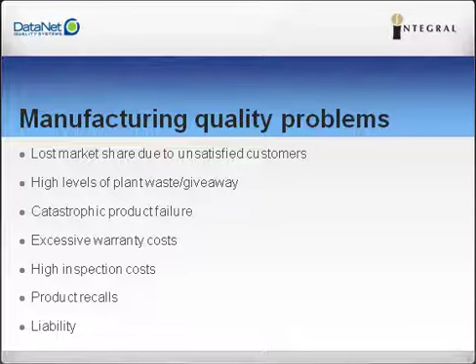We also experience, unfortunately, catastrophic product failures. So when products fail in the field, that leads to huge problems. Obviously, we have customer complaints, we have lost business, we have warranty, we have recalls, and a serious aftermath is litigation. So often we testify as expert witnesses into causes of failure, and many of these lawsuits well exceed $100 million in penalties. So we're talking about a lot of money on the line.

I want to move there to talking about losses in profit. Right now, everybody's hearing in the news about the Toyota recall. It's making big news. But I think what hasn't made the news and what should also be making the news is over the past 40 years, there have actually been 77,000 automotive safety recalls. And that's just in the United States. That excludes the rest of the world.

Another important statistic to understand when we talk about losing money is that the U.S. auto industry spent $14.5 billion on warranty in 2008 alone. So net profit is usually only a small percentage of revenue. So when we think about how much is warranty really eating up of our profits, very often it's eating up at least half of our profits.

Just talking about recall costs of consumer products, where we're not going to talk about automobiles, consumer product recalls exceed $700 billion a year. So when we talk about making an investment in quality, these investments in quality are very, very small relative to the potential gains that we can have.

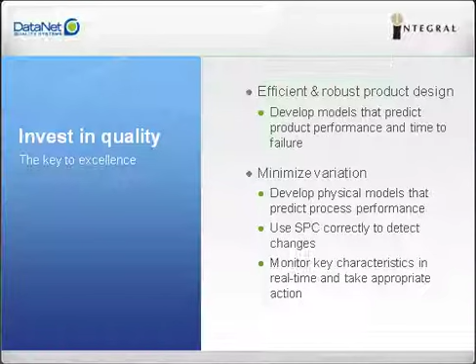Now, when we talk about investing in quality, there are two basic areas that I want to talk about. The first is product design. And in product design, we should be very quickly developing new products so that we can get to market first, but we also want to be developing these products to be highly robust, and by that I mean they work in a wide variety of environments, but also we want these products to be highly reliable.

And what we see from our excellent manufacturing clients is that they develop predictive models that actually predict product performance and actually predict time to failure of their products, so that they know in advance how their products are going to perform in the marketplace. I'm just going to give you a simplistic example of how you can do something like that.

So imagine that you're designing an automotive window and door system. All right? There are a lot of things that you're going to need to take care of. For example, you're going to want to make sure that the wind noise is not too great. You're going to want to make sure that the door closing effort is reasonable. You're going to want to make sure cosmetically that the margins, the seals, the flushness, the gaps, and all that looks really nice. Also that you can cycle the door to failure and know what kind of performance you're going to get or how long the door system is going to last.

What these great companies do is they actually have physical models that predict what the wind noise will be, what the door closing effort will be, what the gaps are going to be, and so on and so forth, for all the design variables, like the material choices we make and also the dimensional choices we make, so that as we're changing dimensions, we can actually see the effects on wind noise, door closing effort, and so on and so forth. So that's where we see the excellent manufacturers stand out, at developing these physical models that predict performance.

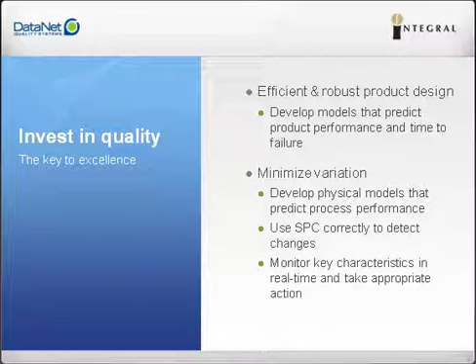What happens is when this goes to litigation and we go back to the plant and start discovering data and information, we extract data that nobody ever bothered to look at real time. But when we do extract that data, very often what we find is there was a statistical change in the process, right, that coincides just with the time when all the customer complaints begin. Had these companies been using SPC real time, they would have been able to detect right away the statistical change and prevent the huge issue that ensued afterwards.

So I want to go into talking about 5 practical steps that you can take to make sure that you have this high quality and manufacturing excellence. And the first step is to prevent rather than to react. So when we prevent, then we can really eliminate our scrap, rework, warranties, repair, customer complaints, things like that. We also can improve our quality, our reputation, our competitiveness, and our profitability, which is really, really important.

So I want to go in and I want to talk about prevention tools. There are some traditional prevention tools, and they tend to be more on the qualitative side. So things like failure modes and effects analysis, FMEA, mistake proofing, cause and effect, brainstorming, things like that. However, I want to see people, and basically the world-class manufacturers, use much more progressive prevention tools.

Those progressive prevention tools include data-driven things like real-time statistical process control, design of experiments, reliability, statistical modeling for prediction, hypothesis testing, multi-response optimization, and so on and so forth. So there are so many quantitative tools available that help us.

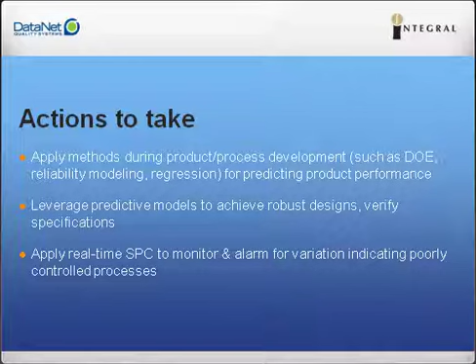So some practical actions that we could take is applying these methods during product development so that we can be predicting performance. And a typical tool that we can be using is design of experiments or reliability analysis and testing and regression models in the product development stage. Also, we should be applying these methods during process development so that we can also be predicting process performance. In addition, when we have problems, we can very quickly deploy these tools as well to very quickly resolve issues.

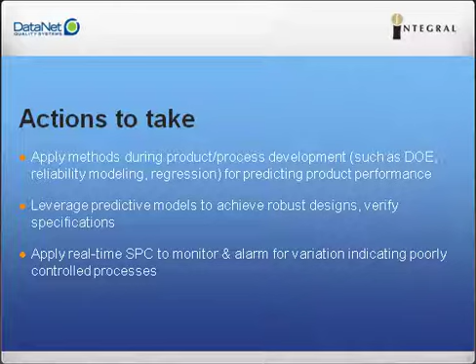We should be leveraging these predictive models to achieve robust designs, highly reliable designs, and make sure that our specifications are right on. One disturbing statistic that we see in our practice is that over 90% of failed products actually meet specifications. So somehow there's a weakness in how we're setting specifications. So as we design products better and use these models, they help us. And then finally, we should be using real-time statistical process control to monitor and alarm people so that we can prevent issues instead of waiting around.

The next thing I want to talk about is properly applying SPC. So this is another practical step that we can take. Now again, world-class manufacturers properly apply statistical process control and get enormous benefits. The first thing, though, we need to understand is the purpose of statistical process control.

So the goal of SPC is to detect changes before we're actually making unacceptable product. A misconception is that the goal of SPC is just to detect unacceptable product, but that isn't. Okay, it's to detect changes before we're making unacceptable product.

And we talk about stable processes or in-control processes, and what do we mean by that? What we mean is that imagine that we're manufacturing something, we're looking at a dimension such as outer diameter. If I look at outer diameters at one point in time and I look at the distribution of those outer diameters, if later on in time I go back and look at those outer diameters and the distribution stayed the same, then I say the process is in control or outer diameters are stable.

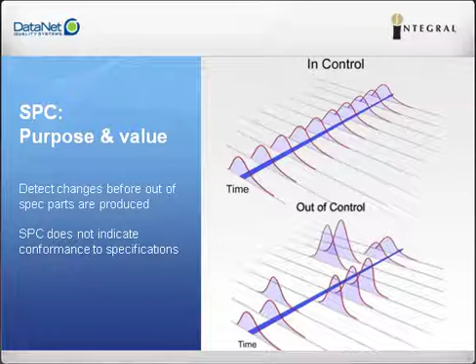When we have that stability or in-control process, at that point we can make a lot of predictions. We know what to expect of it and we can predict. On the other hand, in the lower right-hand corner, you'll see a graphic where, let's suppose that the first two times we look at outer diameters, they look consistent, but the third time we go look, the outer diameters are following a different distribution. We say the process is out of control because we see unexpected behavior. Now, even if all of these outer diameters are still within specification, we should expect changes in product performance. I know that's hard sometimes to understand, but we see that all the time.

I'm going to move on and talk about, if you do want to apply SPC, what are some of the supporting methods? Before we even look at data in general, whether it's for SPC or any kind of analysis, we should really look at our measurement systems. All measurement systems are subject to error or variation, and we need to make sure that we're not getting too much error in our measurements; if we are, we need to fix that before applying an SPC program.

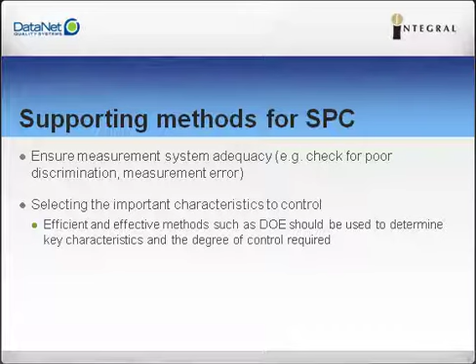The other thing is that in most industrial processes, there are probably millions of variables that affect performance. So we really need to focus on using tools that help us quickly hone in on the few key variables that really do affect product performance. The most effective tools that we see are design of experiments, regression, statistical modeling, and so on.

Now, another misapplication of statistical process control is that we select an inappropriate chart. The common X bar and R charts or the individuals and moving range charts were developed back in the 1920s. Back in the 20s, industrial systems were much more simplistic. They tended to be slower in speed and so on. Nowadays, production systems can be quite complex, very high speed, and they have a lot of issues associated with them. We really shouldn't be using some of these traditional charts for many modern-day production systems.

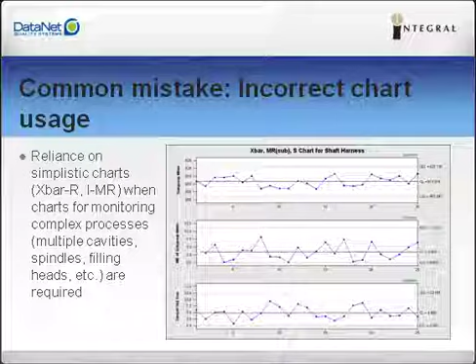I also want to talk a little bit more about chart selection, and that is we have very different kinds of production systems. Some production systems are very unit-oriented: I make a part, I make another part. Others are much more batch systems or even continuous processing like extrusion processes. For many chemical processes or extrusion processes, things like CUSUM charts, tabular CUSUM charts, or exponentially weighted moving average charts might be more appropriate for those kinds of applications.

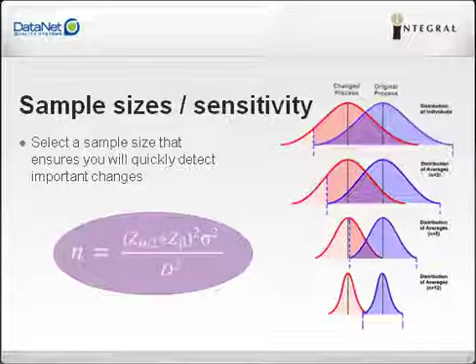Now, another issue that we need to address is sample size. World-class manufacturers know how to pick proper sample sizes to be able to detect the kinds of changes that they need to detect. If we have inadequate sample sizes that are too small, our process might change considerably, but we're not going to know about it until it's way too late. We can also make the opposite mistake, and that is have sample sizes that are too large and then detect changes that are really not practically important, even though they might be statistically significant. Another issue that we need to worry about is how to sample.

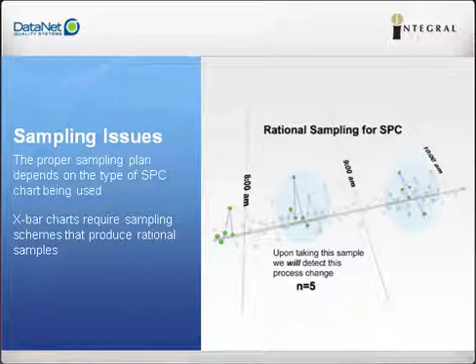So depending on which type of chart you've selected for your SPC program, how you physically sample is an extremely important issue. Whether or not you need rational samples is something that you need to consider in your sampling plan. And then finally, world-class manufacturers understand the distribution of their individual measurements.

So for example, does our process really use 6 sigma, or maybe does it use more sigmas because it follows a non-normal distribution? Most industrial data actually follow non-normal distributions. You're actually more likely to get data in one direction than another. So for example, if I have a specification on roundness of a gear, and perfectly round is 0, we can't get better than 0, although we would like our data to tend to cluster towards 0.

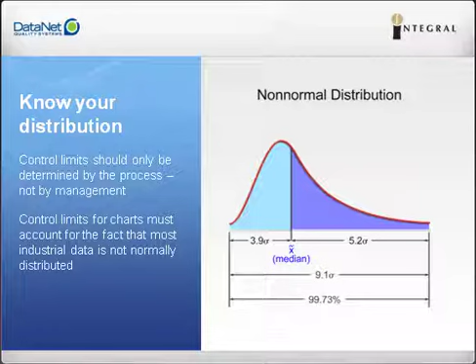On the other hand, how out of round could we get? We could get infinitely out of round. And so it's just physically natural that data is not going to follow a normal distribution. So we should understand that, and we should be able to predict and model what our data looks like.

So what kinds of actions can we take? First of all, we should verify our SPC assumptions. We should ask ourselves questions like, do we have adequate measurement systems, or is there too much noise in our measurement system? Are we looking at the right characteristics that really are predictive of product performance? Are we using the most appropriate kinds of control charts for our application?

Do we have appropriate sample sizes to detect the kinds of changes that are important? And what kind of distribution does our data follow? We should also be educating operators and engineers so that they can take advantage of these tools. And then finally, we're going to need to leverage automated tools that can actually help us monitor processes in real time, so things like automated gauging and real-time statistical process control software.

Now, getting back to our 5 practical steps, we move into step 3. And step 3 is minimizing variation. I'm going to start out by asking a question, and that is, if we had an industrial process and all of the products coming off the line were identical, then in theory, when should they all fail? And of course, the answer is pretty much at the same time. Now, a lot of times people will argue, well, they're not going to fail at the same time because customers use them differently and so on and so forth.

But in our experience, when we go into manufacturing plants and pull a bunch of parts right off the line, take them into a lab and test them to failure, we see that they fail at dramatically different times, which is very surprising. We may get one unit failing at 100 cycles, and yet the next unit off the line is not failing till over 100,000 cycles. So the question is, why the variation in performance? I would argue it's because of variation in the components.

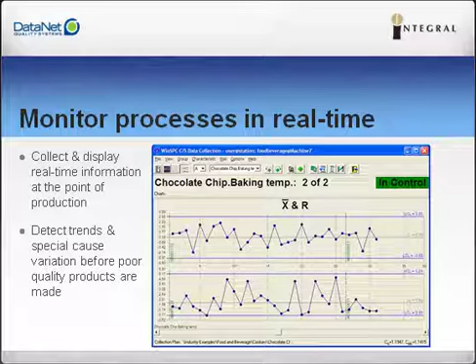The second reason that these companies use software is to help them better detect trends and special causes. A real-time monitoring system uses statistics to identify excessive variation well before the weight or the length or whatever characteristic you're monitoring goes out of control. These companies focus on preventing their processes from making bad product in the first place.

One of the big advantages of an automated system is that once a statistical trend or anomaly is detected, it can alarm individuals in a variety of ways, from a simple message box to flashing lights to an email message, or to even very complicated commands that might signal a line to shut down or reduce the feed of an ingredient. The majority of the time, these alarms are meant to trigger some kind of human intervention.

And as I've already mentioned, one of the key steps to minimizing variation is to alert those who are in position to react quickly to problems. Often, these alarms are intended for the operators, or your first line of defense. They're usually the ones who can react the quickest and take the appropriate corrective actions. An automated system should be able to alarm users of problems, guide them through the corrective action process, and document their activities. So this helps enforce accountability and provides data for a much broader analysis later on.

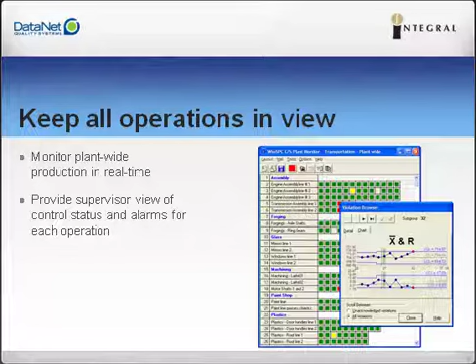The second item was visualization. In a typical manufacturing plant, there are hundreds of characteristics to monitor. The operators are usually focused on just a few, and only the ones that impact their operations or their line in production. To identify broader sources of variation, managers usually use some type of plant-wide or summary view. With a dashboard-style view, problems become immediately visible, making rapid response a much more likely outcome.

The last item that companies focus on is investigating and prioritizing quality improvement efforts. They start by taking all of their historical data from their real-time monitoring systems and search for excessive variation. The goal here is to uncover and expose opportunities that would have otherwise gone unnoticed.

One of my customers is in the food packaging industry, and they make thousands of different packages across different product lines. And they were able to analyze their historical data, not by product or by process, but instead by fill heads and operators. And they identified a situation where several operators were making adjustments to the line that ended up causing more variation, not less. It's this type of investigation that companies who are trying to minimize variation do on a regular basis.

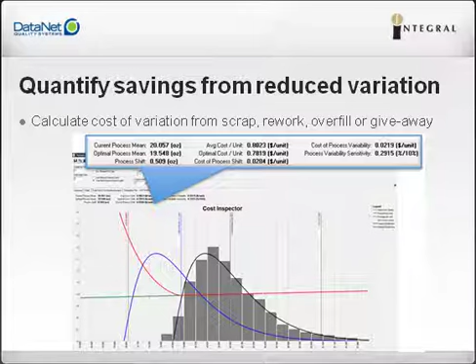What this cost inspector does is show me how I might be able to reduce my variability by a certain percentage, say 10 or 20 or even 50%, and what the cost savings could be. So as an example, looking at the blow-up here, if I was able to reduce my variation by 50%, I would save $141,000 or so for every million parts produced.

Companies that effectively minimize variation start by automating their data collection activities, and they push them down to as close to the production environment as possible. Second, they provide tools to the people who are in a position to quickly react and take action whenever an alarm or a violation is triggered. And finally, all of this data is available to them to search and uncover and prioritize their opportunities of not only reducing variation, but also reducing costs.

All right, I'm going to hand the reins over to Steve, who's going to talk about the importance of optimizing your product designs and your processes. Steve? Thanks, Frank. Good afternoon, everybody.

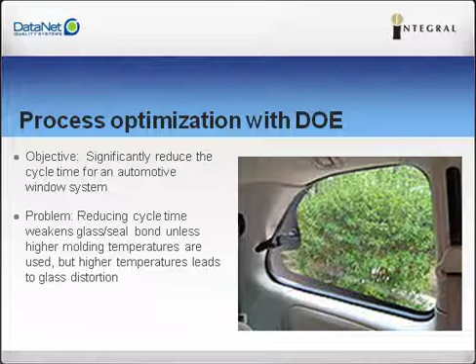Using DOE, we can conduct an experiment. And again, the outcome is a predictive model for all of the relevant responses, in this case distortion and bond strength. And we use that model to understand and quantify the relationships between the critical factors as well as interactions between those factors.

I'd like to take just a second and show you an example of a predictive model, which is the output of a good DOE. And specifically, here's an example of a model for the distortion response. So this is just one of the two responses that we're mainly interested in. And what the model describes is simply the mathematical effect that each of our factors that we investigated, such as glass temperature and mold temperature, as well as their interactions, have on the response, the distortion response. Now, clearly, in this case, distortion is bad, so we would like a solution which minimizes this particular response.

We would also develop a second model based on other responses, such as bond strength. In that case, we would want to maximize the bond strength. Now, working with these models may be fun or tedious, depending on your joy with calculus or algebra. I'll assume most of you would prefer not to revisit calculus. So, fortunately, with the software available today, there are many visualization tools and techniques.

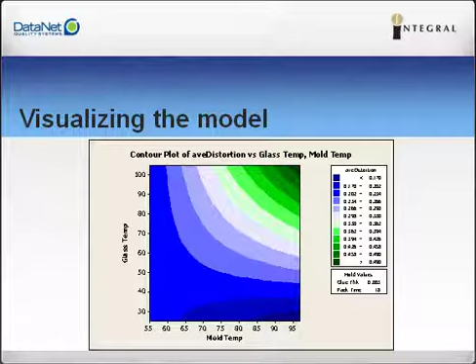Now, again, this system would be difficult to understand without a tool like design of experiments, so that's where the power of DOE comes in. Just remember that this picture just relates to one single response. We would also, in a DOE, look at other responses. For example, we'd have a model for bond strength and a picture for bond strength.

Now, in a regular DOE, the responses can be really anything of importance, such as reliability targets, material requirements, dimensional requirements. It's very important when you're trying to optimize a system to think about all the relevant characteristics, even if they're not causing a problem, because as we optimize a process or a design, we're going to potentially be making some changes that could impact things that are not a problem today. It's critical that we optimize the system rather than individual features.

To sum up, I'd just like to summarize some actions that I recommend you take when it comes to process optimization. Number 1, leverage DOE. It's a powerful tool to learn and optimize efficiently. While DOE has often been used historically in problem solving, it should be used more frequently and is used by progressive companies proactively, both in product design and in new process design.

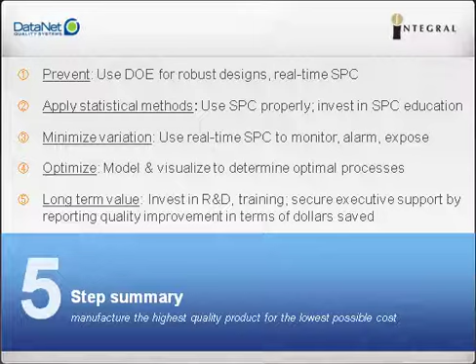And lastly, they focus on long-term value, investing in R&D, training, securing executive support by reporting or translating your quality statistics into dollars and cents. These are all characteristics of companies that improve their quality, achieve the highest level of quality by reducing their costs.